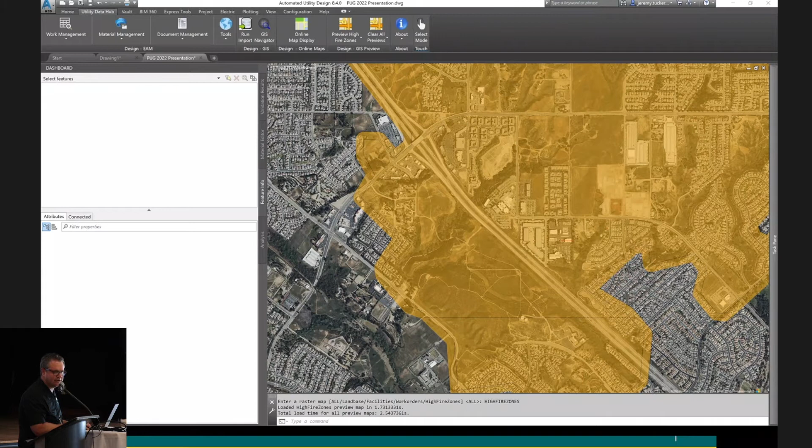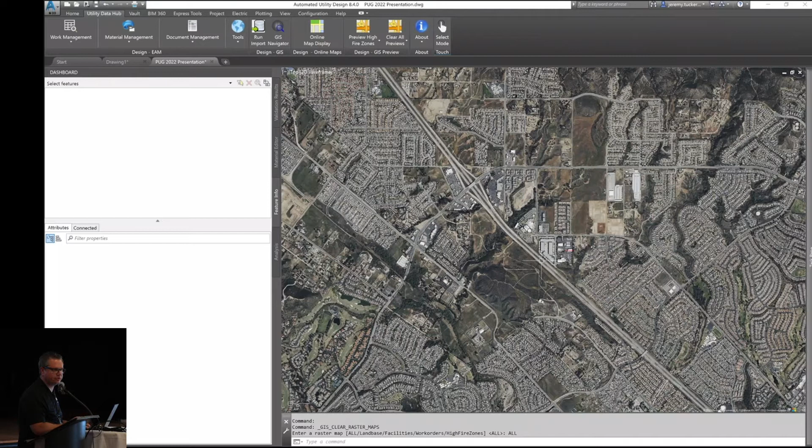When we're doing design, you need to know when bringing your stuff in, how do I design it? Do I need to use some of the materials designated for high fire use - some of our fusing and fault indicators and conductor and even poles. We're using composite poles in those areas now. So you want to know where you're at, what zone. We have different ratings, like elevated or extreme. Basically you can overlay where you're at and see if it falls within.

The enhancement we're actually working on will allow you to select your facilities or features in the design and run a service that'll go pull the GIS, and it'll pull the actual rating out of the GIS and set it in an attribute on the design or feature. And we'll push that data back through with the rest of the work order information through the work management system and back into SAP and all that good stuff. So that's our high fire.

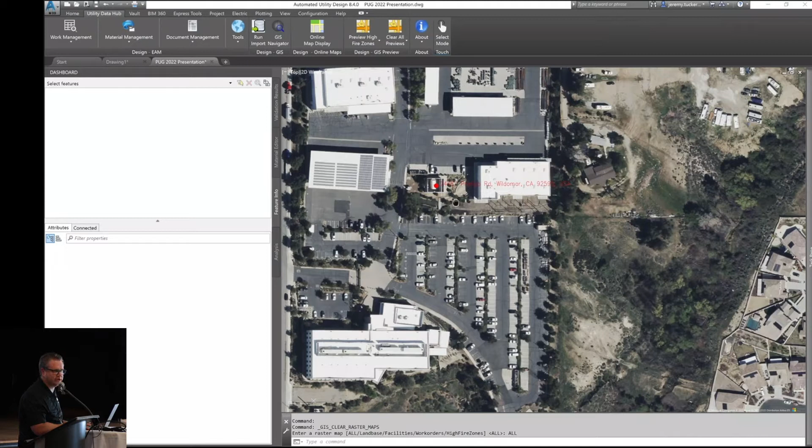Let me clear those and zoom back in so we don't typically zoom out that far. All these views are based on the extents of your model space that you're in right now, and also the zoom scale. So whatever zoom scale you're at, that's the zoom scale it's going to look at in the GIS when it pulls the capture out of the GIS.

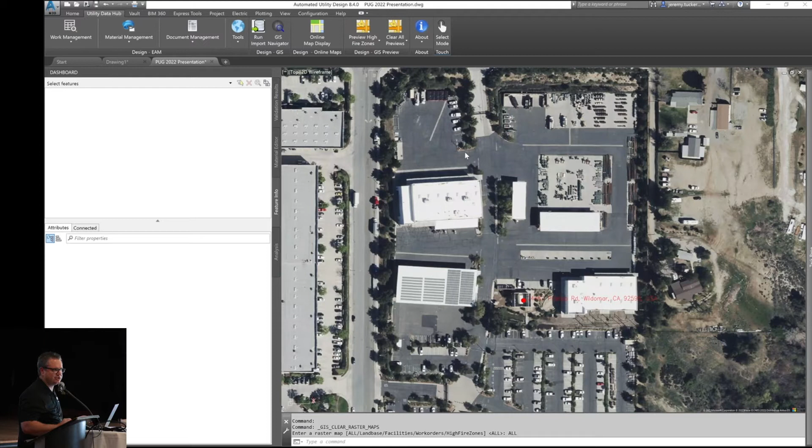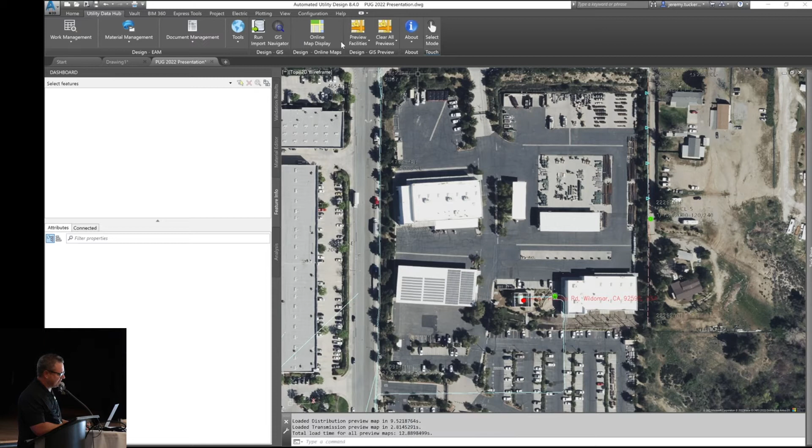So you got to know where stuff shows up - we get way more detail on our facilities the closer you zoom in. But this is really just to be used for reference. So when you're getting ready to import, you know where to make your boundaries for your import to bring the stuff in from GIS. You can see I brought in some facilities right there.

I can throw some land base in behind it from our GIS. And as you can see, my extents there is just a raster.

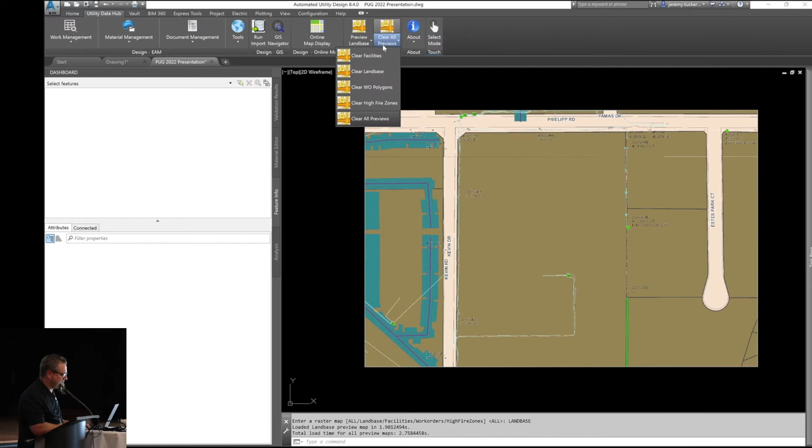Let me clear these again. There we go, turn this back on.

So this is our work order polygons. Obviously there's no information to it. It's just showing you, hey, there's work going on in this area, go check it out at this point right now. Go check it out in the GIS where you can get all that information. But it's a good, quick way without having to open everything else up to know while you're in AUD, hey, you got some other things to do here.

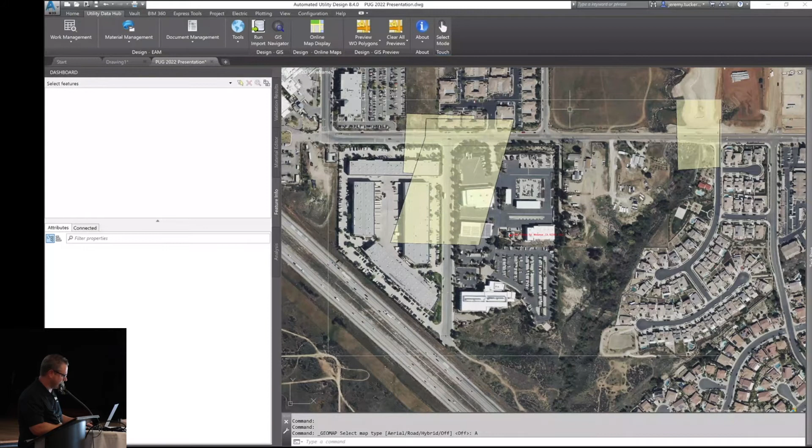So those are our previews. Let me jump back.

All right, SAP equipment details. So when we import from GIS, we are pulling in a bunch of attribute information data, but in some cases it's not all there.

So SAP is basically where all our assets are housed. So we created a service to be able to reach out to SAP and suck in equipment data, and populate it back.

Let me see what I said here. Yeah, so one of the nice things about this is you can just throw a feature in and type in the structure number and then make the call and pull that data in. You can be one to many, however many objects you want to select. You can run that all at the same time.

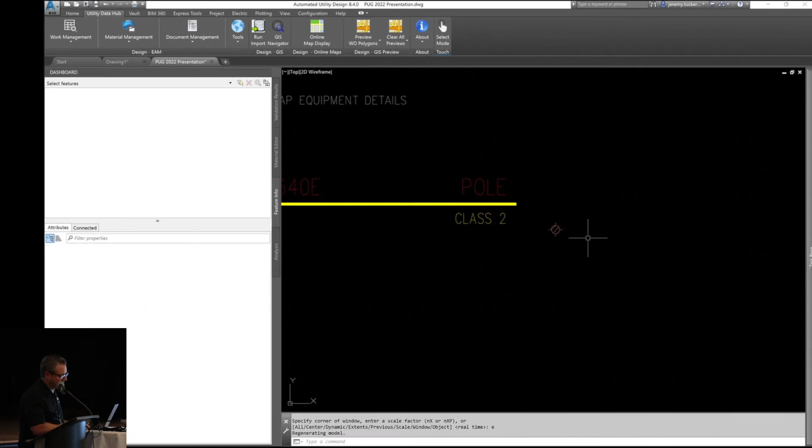Let me get to that here. I know it's not super exciting. It sounds neat, and then it's like, oh, all you did was push a button.

Basically right now, all I had to do on my pole was just provide the structure number. That's all that's required. And then I can come up and click SAP equipment details.

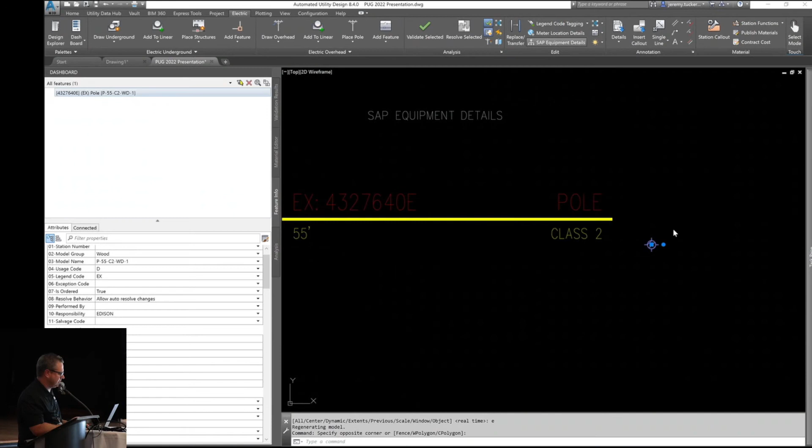And it's going to give me a message back saying that I did it successfully. There are a few error codes that come back from SAP if it couldn't retrieve the record for whatever reason, and it'll tell you what those reasons are.

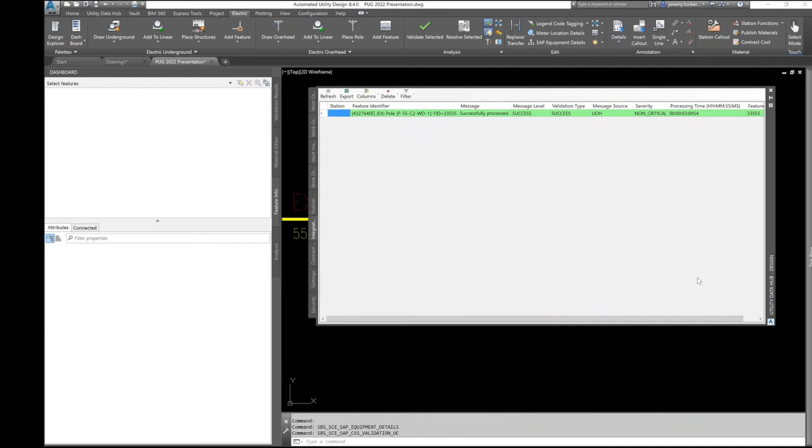But basically what we've done, if I go back and select this pole now, so I was able to bring in all this different information about this pole. I have anything that was inside of the SAP record basically associated here.

We're not really doing anything with that right now, but it is there for informational purposes. There's a few things like JPA numbers and that type of stuff that we plan on populating in the future and creating some reports and stuff like that.

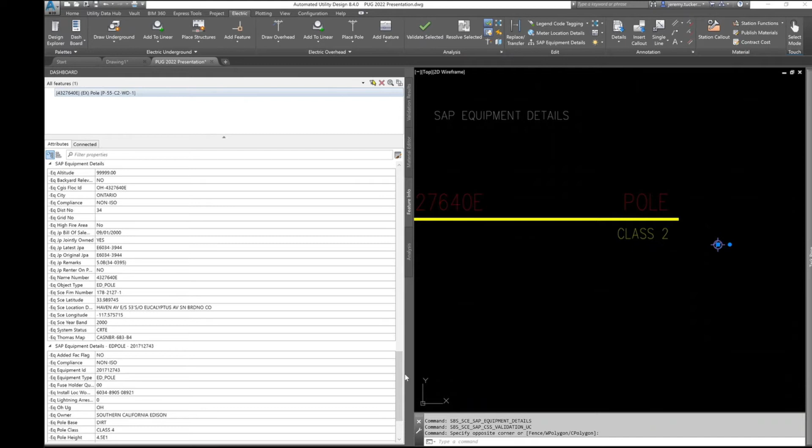So that's SAP equipment details. We have a similar thing for meters. So all of our customer information moved from a homegrown application into SAP ISU.

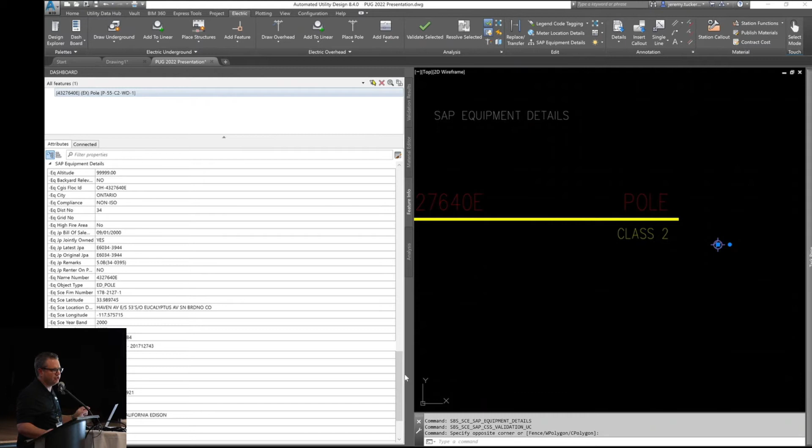And so we actually now have the ability to make a call and pull the device location and all the meter customer information. We're using very little of that in the AUD design because that was one of the things we were trying to get away from in our last system, was not doing much with meters. So we're just providing basic address information and stuff like that.

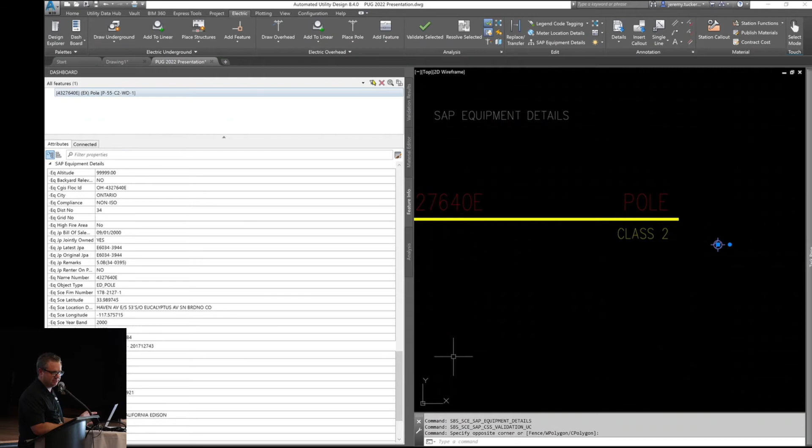But it makes it nice and easy for the designer, not having to go search somewhere else and then come back and type it. They can suck that data in. And I won't demo that because it basically looks the same as SAP equipment details, does the same kind of thing.

All right, annotations, everybody's favorite thing. When I was putting this together, I was kind of laughing because all I'm going to do is press a button and my annotation is going to show up, and you're going to be like, ooh, that's really neat. But what actually went into making it do that was a lot of work. So hopefully it gives you some ideas of what can be done.

The first one would be what we call the station call out. That's the work location, basically. In our old tool, in the old AUD, we actually had a custom user interface where we entered in material. And as part of that, we actually had the ability to edit the descriptions of the material, move the order of it, how it showed up in the call out when we placed the call out. And obviously AUD doesn't work like that now. All your annotations are rules driven.

I'll say out of all the things we delivered, this is the thing we got the most complaints about, because people wanted to be able to move everything around. But what really happened with it caused problems for us. You saw how many designers we have, how many different departments. Everybody was doing it differently - the descriptions were different, the order of the material was different. It was crazy.

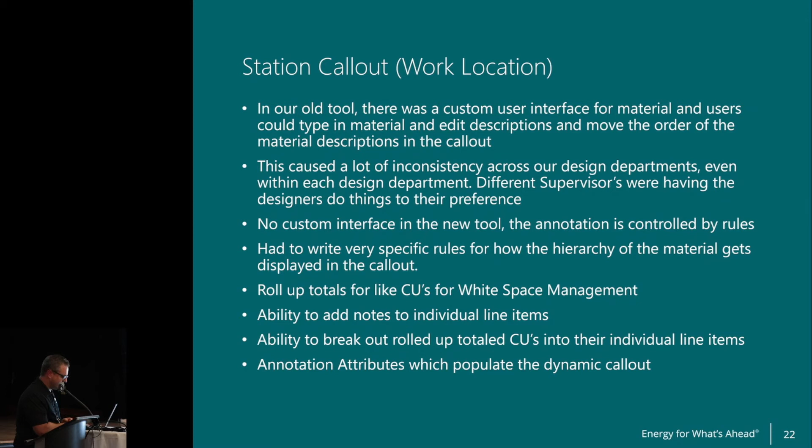I told Jim I hope I don't offend him with my high-level generalization of the rules that he wrote for this.

Basically what we're doing is starting out with the construction type - is it overhead or underground? Then the service type - is it primary, secondary, service, street light? And then it goes to the feature class, ordering it the way I showed you. So if it's primary, structure's always going to be at the top for us if you have a structure in the list, and everything else falls behind that - primary duct, primary pole head, primary equipment, primary conductors, and then secondary and so on. Then it breaks it down by status.

Status is very, very important to us - a lot of our pricing rules in our costing tool are driven by the status. So on the top half, we have like 4 or 5 different statuses for remove, and 3 or 4, maybe 5 different install type statuses. They all mean things, but they all should be shown in a very specific way in the callout. So as you can see, it's starting to get way more complex - it's not just put in first, it's more than that.

But at the end of the day, what we're really trying to do, what it all boils down to, is when you're on a pole, it builds the pole from the top down. And if it's an underground structure, it's from the structure out - that's basically what we're doing with it.

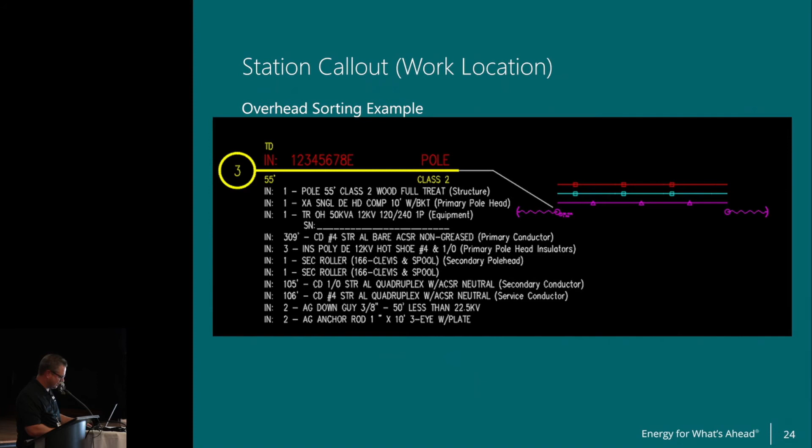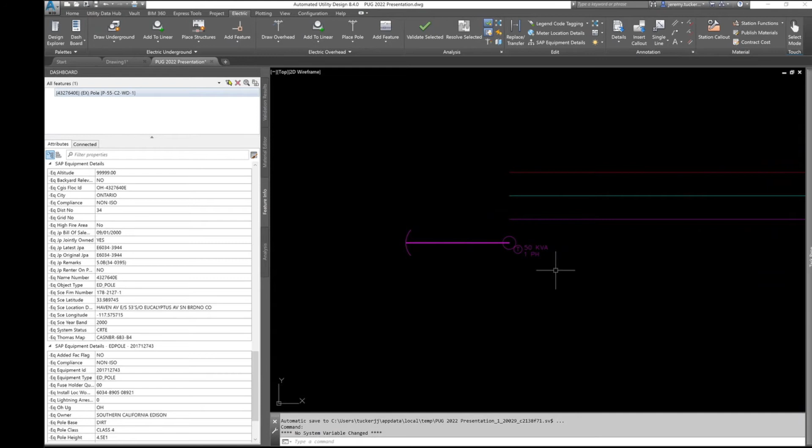All right. Oops, let's see. Let me move this guy back here. I'll kind of show you - I won't get too deep in this. I'm already over my time, I'm sure. I told you guys I could talk all day about this. What was that? I could. But then I won't know what to do because it's a different color. I'll be like, oh my goodness. That just blinds me. How's that for you guys? Does that help you guys? No? Yeah? Okay.

You're probably not going to be able to see my callout now because all our callouts are for black. But anyhow, let me just show you what we have here.

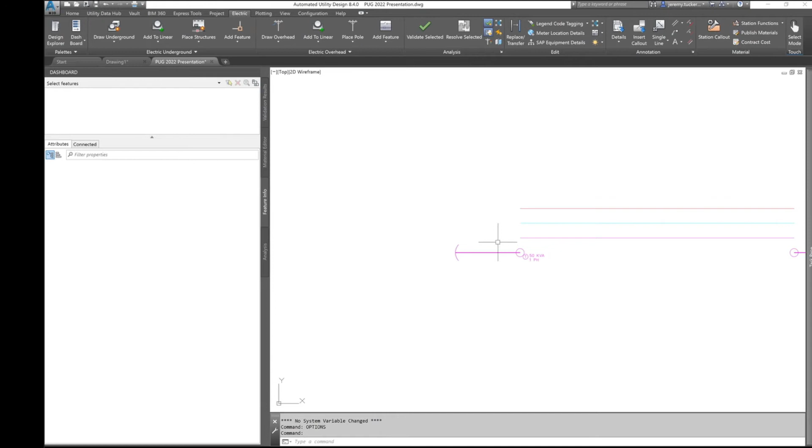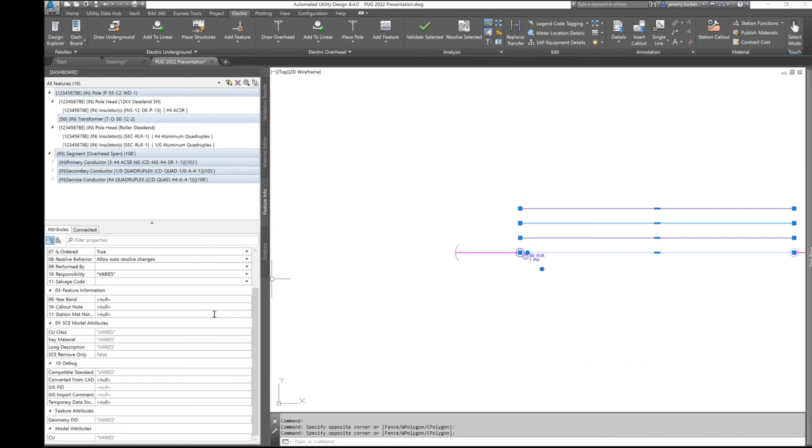I've got my pole - I'll run through these quick. Got my pole head, my insulators, my conductors. I put primary, secondary, service on there. And then basically all I had to do was put my pole number in, and now I'm going to come select my things that I want to put in my callout.

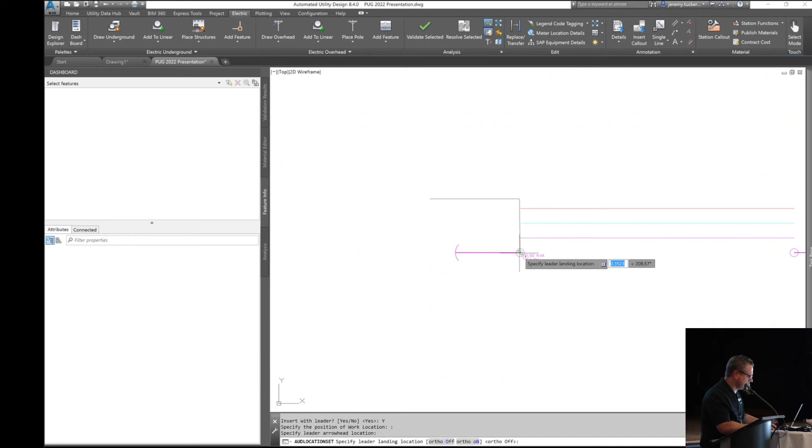So you can see at the top, you've got the pole, then the cross arm, then my equipment, and then my conductor, the insulators, and then it's moving down to secondary. There's my secondary conductor, my service conductor, and then my down guys and my anchors are always going to come last. So that's kind of how that works.

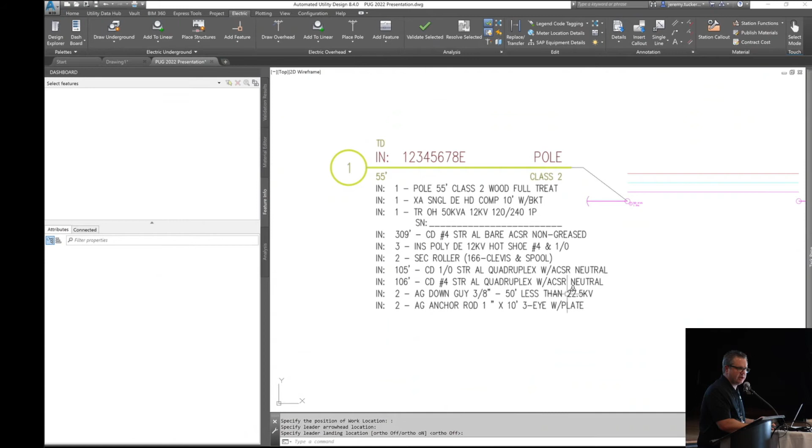While we're here, I'll show you some of the dynamic stuff that we have.

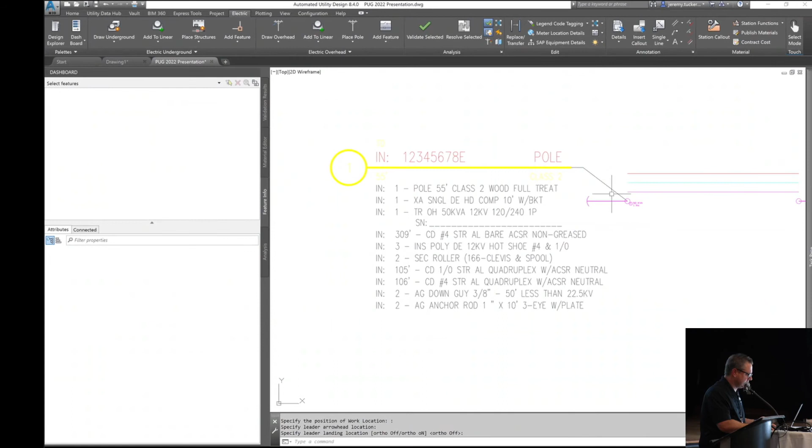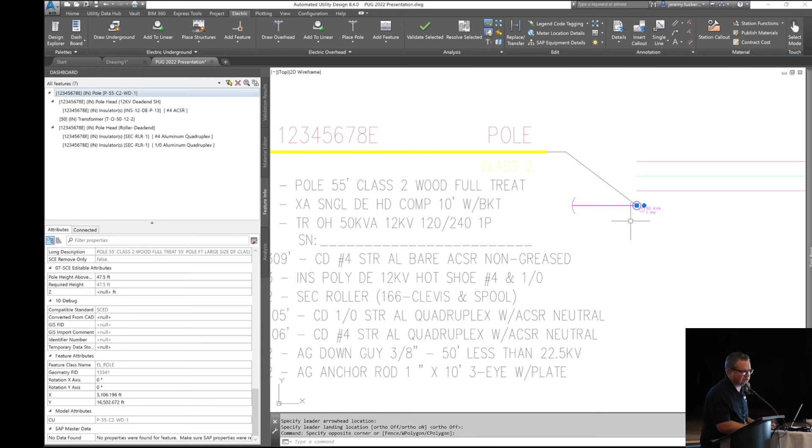These attributes are always going to be on the structures. Typically, 9 times out of 10, we're going to station the structure. We do have cases where we're stationing equipment using separate work order numbers because our costing tool can't accept multiple work order numbers on one station, so that was kind of a weird one. But anyhow, let me move this over so we can see. I'm on the pole.

So the first one I'll show is the high fire, and this is what we're talking about automating. Right now it's just an attribute that the user has to set.

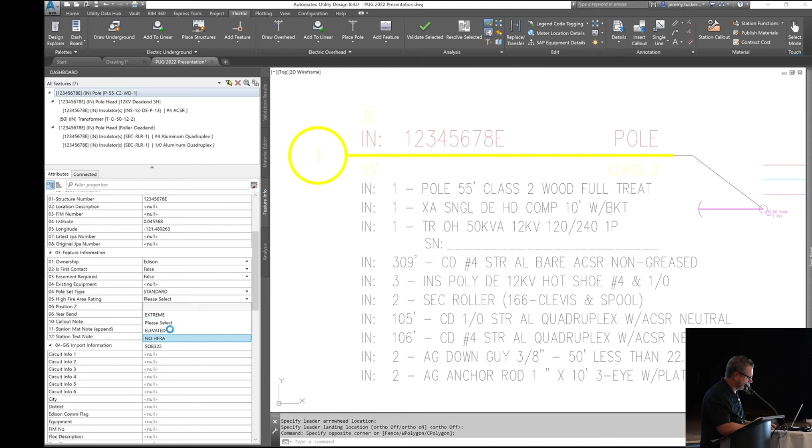Let me actually select something this time. So if you look on the call out, when this finishes right above where it says pole, it's actually in yellow, you can't see, there we go. So it populates extreme up there for you.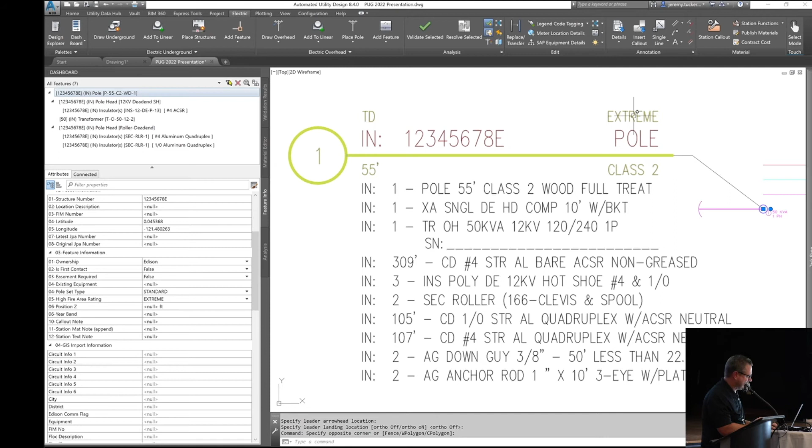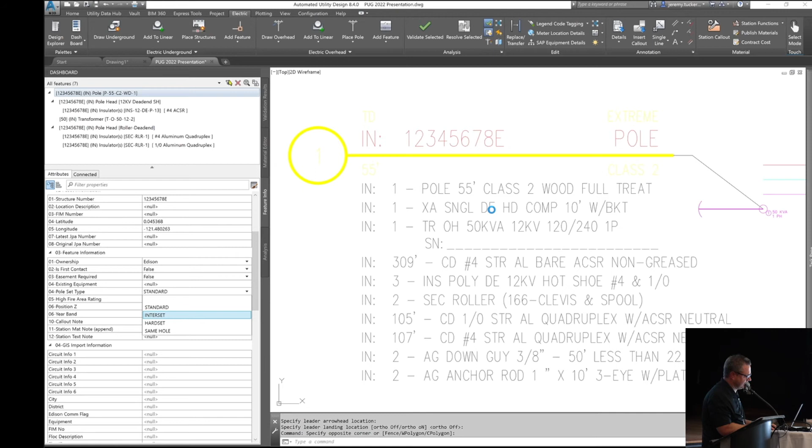Then we have the pole set type. So this would just be like a new pole going in, nothing in the way. We do have different things, so these are more like crew notes. So like if it's an interset pole, we're going to call it out interset, or hard set, or same hole. We kind of gave those things.

We did also add, if there's an easement required, it's going to populate automatically if you set that. I'm going to put it at the top. And then...

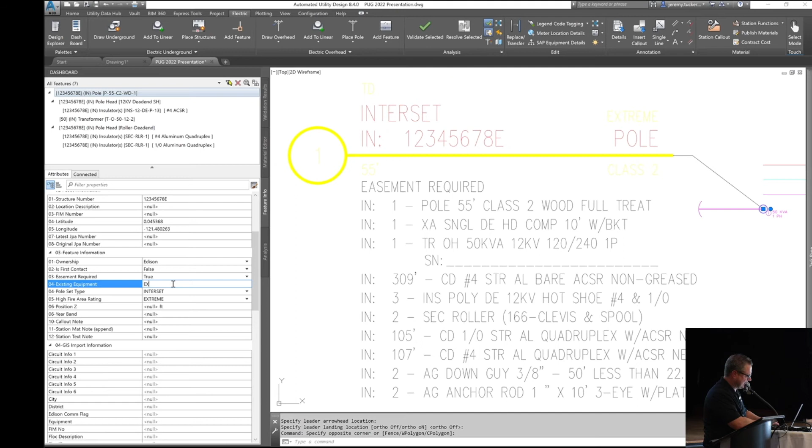We added a place where you can type in a note. This may be something that we automate more in the future, but right now it's just a type in. It allows you to put existing equipment on the pole. So part of our rules right now say, hey, if something's status is existing, obviously it doesn't go on the material list, so it doesn't show up in the work location. The reason we didn't really automate this yet was because what if you don't want something to show up? That's why we have it as a type in right now.

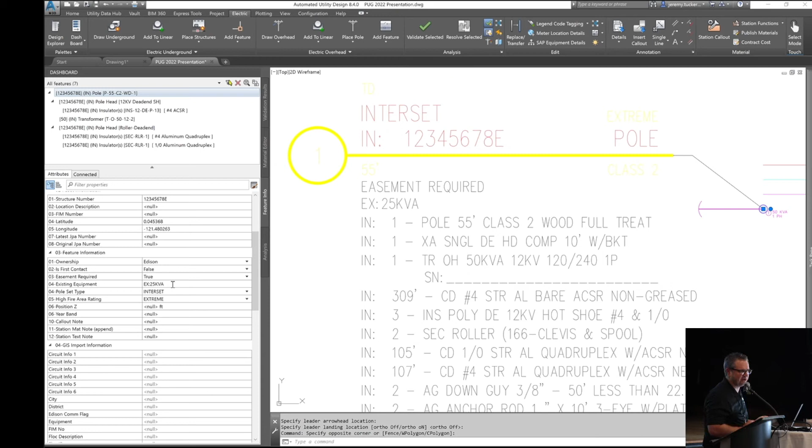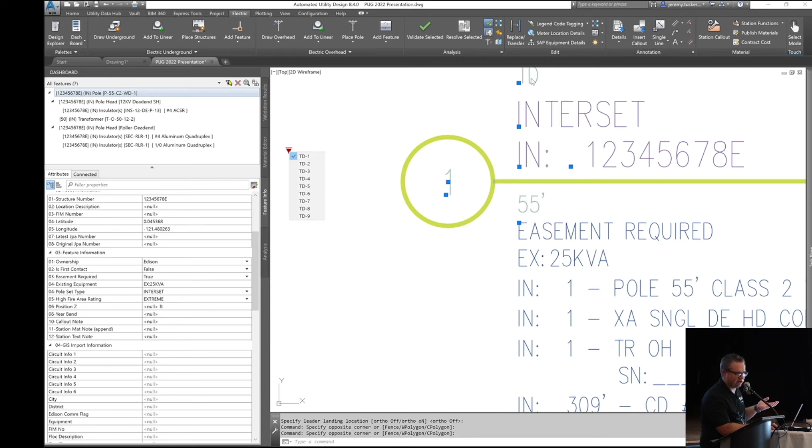So that's my overhead. Oh, we did do this - crazy request. So we do have, for when we have work orders or designs that have up to 10 different work order numbers on it, depending on what kind of work you're doing - some could be program work, some maintenance, some new, that kind of stuff. Some of these jobs are so big it's too hard to read through the map and say, hey, which work order number is it? And by the way, we are populating the work order number right here where it says TD above it. But what we're doing is we actually have a legend for this that gets placed as part of the final map, and it has the TD numbers that actually match the different shapes. That helps with the work order review and keeping things straight. We'll probably throw that into the attributes and relate it to the legend we created. We just haven't gotten that far yet on that kind of stuff.

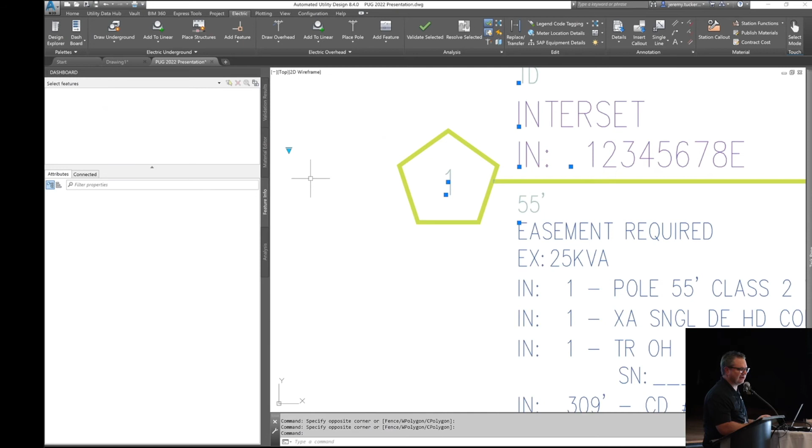All right, I'll just show a quick one on underground. I don't want to belabor this, I just want to show how we split out stuff. So I'll select these.

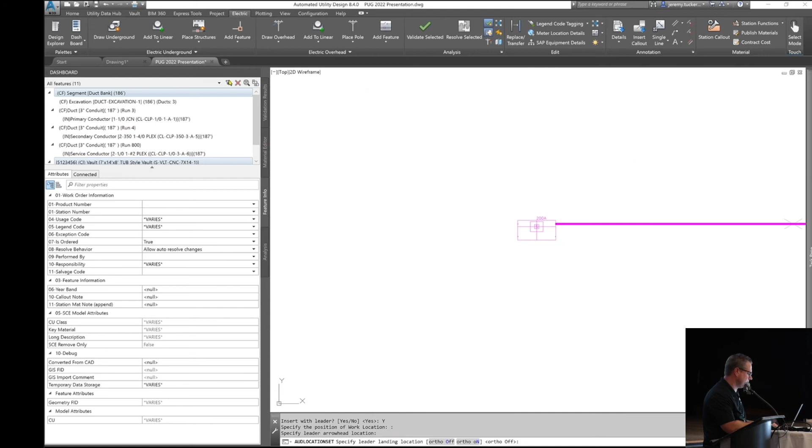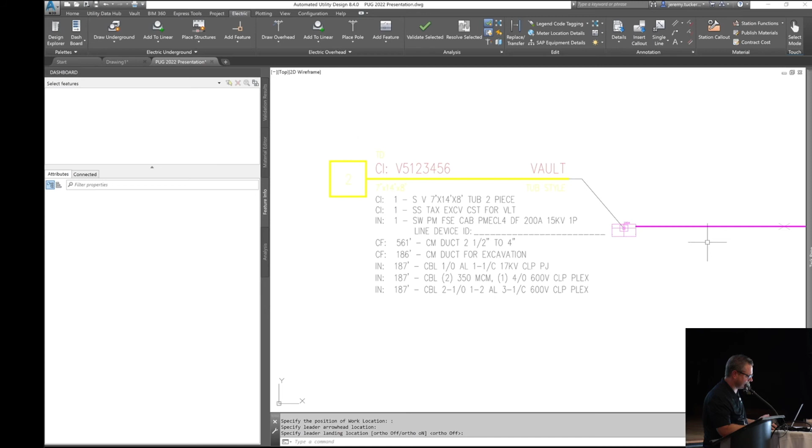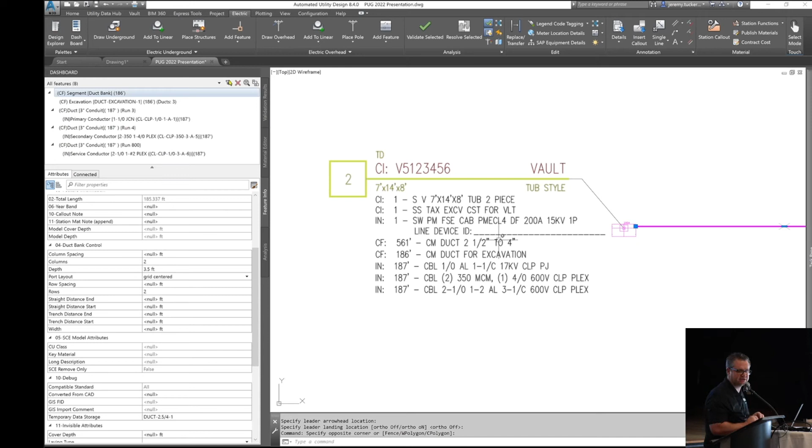So as you can see, it did the same type of thing. You've got the vault, and then it has the switch and the duct and the cable. But if you look here, I actually have a couple different runs - some primary and some secondary - but it rolled all the duct up into one total, so you can't tell how many feet is primary, how many secondary. This we've actually added on anything - any feature that does this, that rolls up, you can do this, but this was an easy example.

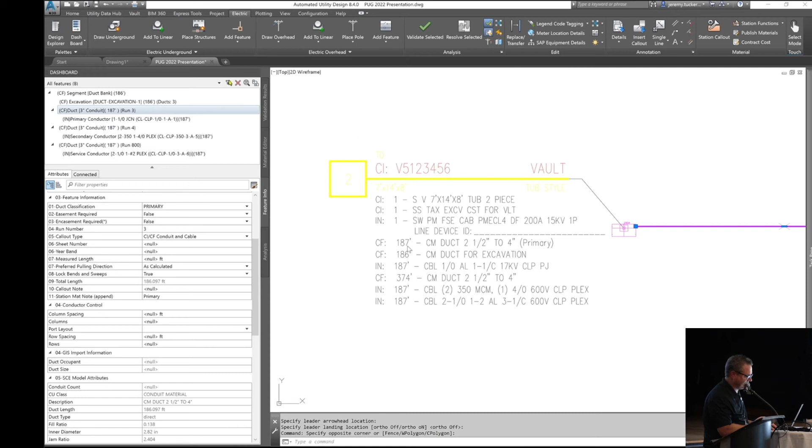So I can go to the duct, and this one's my primary one. I'm going to come down, and in my attribute here, typed in primary, and it breaks it out now, and you can see that where I typed in primary. So we're looking right here now. So now it went from like 500 to 187. So it broke out that individual run. And so I can do that on any of them.

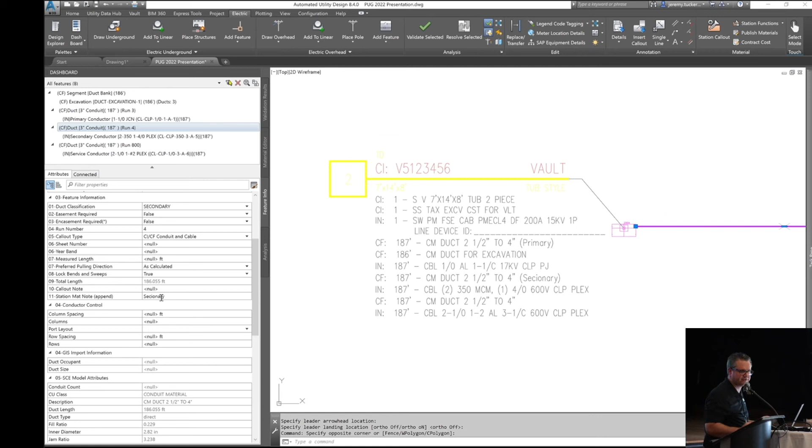So like if I will go to my secondary now, so now I broke out my secondary. So that's been very helpful, and that's kind of how we appeased the users. They're like, hey, we can't write notes, we're going to burst the call out. And we're like, no, don't burst the call out, please. So this has actually helped us out a lot by adding that. That was something we added after the fact, after rollout, just based on feedback and stuff. So that's been very helpful to us.

All right. This is our pride and joy right here, or it's our worst nightmare, the next one. So this is our underground duct and cable call out. We needed the ability to capture the number, the size, the length of the ducts.

That's pretty common. We needed the ability to capture the cables in the duct with the status and the phasing and the cable pulling results. So we show the cable pulling results on the map as part of our print. So that was one of the requirements.

We need the ability to control and track duct runs breaking off from the main trench line. So trench is very important to us. We actually tax customers on trench. It's a tax that gets collected by the state, and we get audited on that. So we have to be very careful in how we do our trenches. You got to make sure you're not doubling up segments, because every time you put a segment in, we're charging for more trench excavation and stuff like that. So that was one of the things.

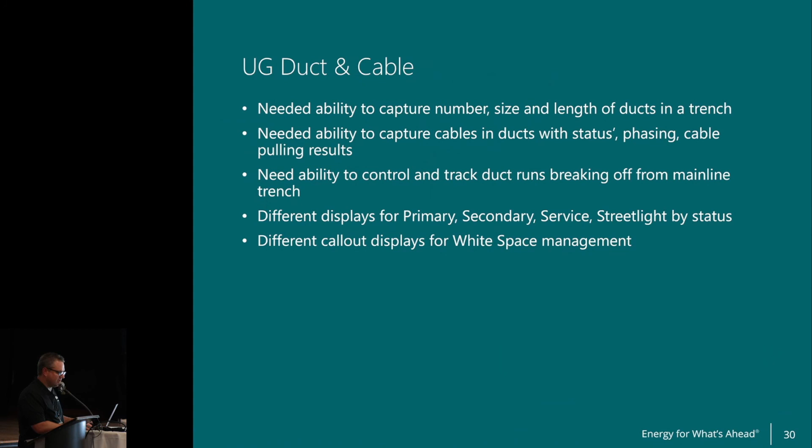And then we have different call out displays for white space management. Again, for some people, they may be like, ooh, big deal. We'll just use this same one here. So our call out is actually related to the duct.

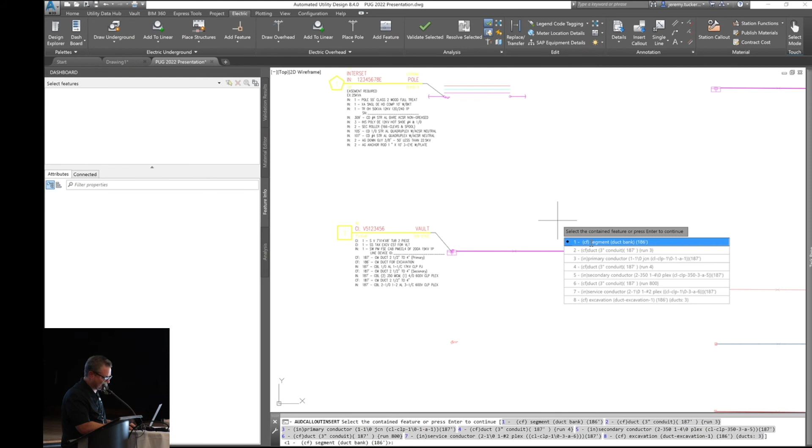So you can see the 3 in the circle, that's our run number. And then the box tells you how many ducts, what size, and how many feet. And then below, it has the from-to, so it's telling you what structure it's running from, where it's going to. And then it tells you the cable. This happens to be primary, so it tells you the voltage, and then the tension results at the end.

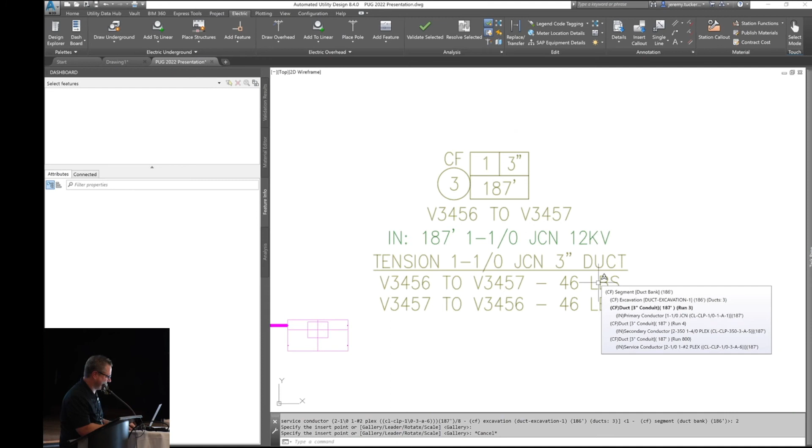Woohoo! So I'll just show you the couple different views, and then we'll go to the more complicated one. So on the duct itself, the attribute is there in our feature information.

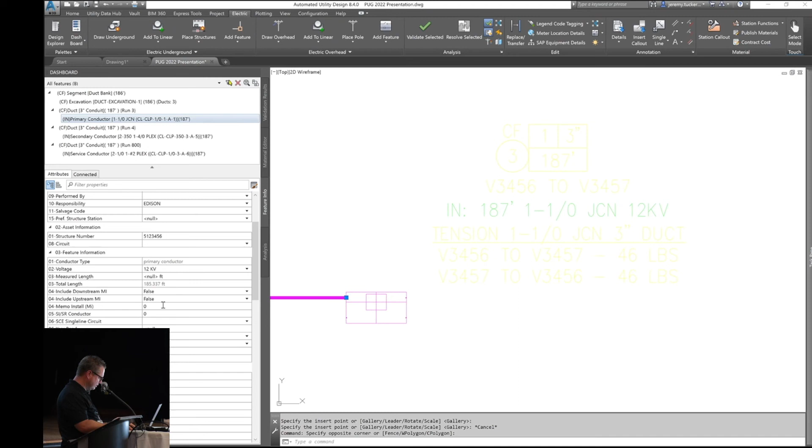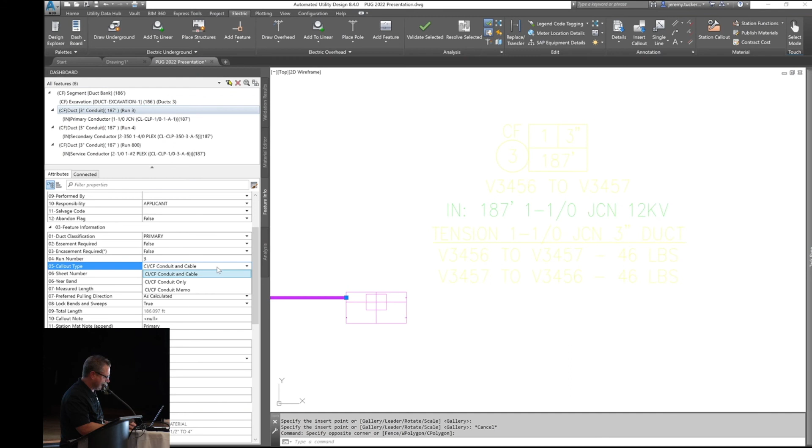Oh, I'm on the conductor. I'm like, where is it? There we go. So call out type - we have different uses for this, but we have the CI/CF conduit and cable, which is what I just showed you. Then we have conduit only, and we have memo when we're crossing prints, so we don't double call out the lengths and stuff on it. But it's all dynamic, so I just come here and change it.

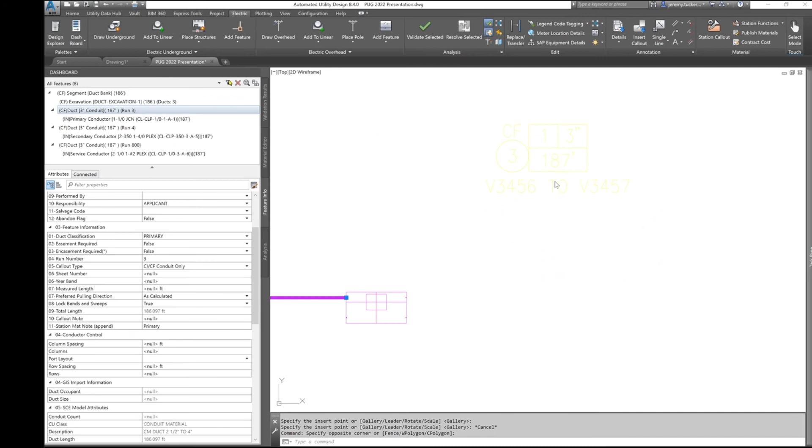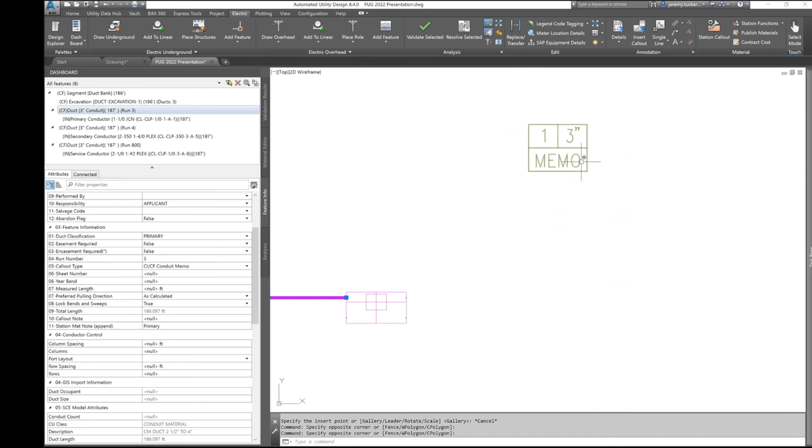There we go. So now you see the cable and the cable pulling results are no longer showing. It's just a duct-only call out. And then the memo. So we have this for basically all the statuses or all the types - for primary, secondary, service, street light, we have different variations of this, but it works the same way.

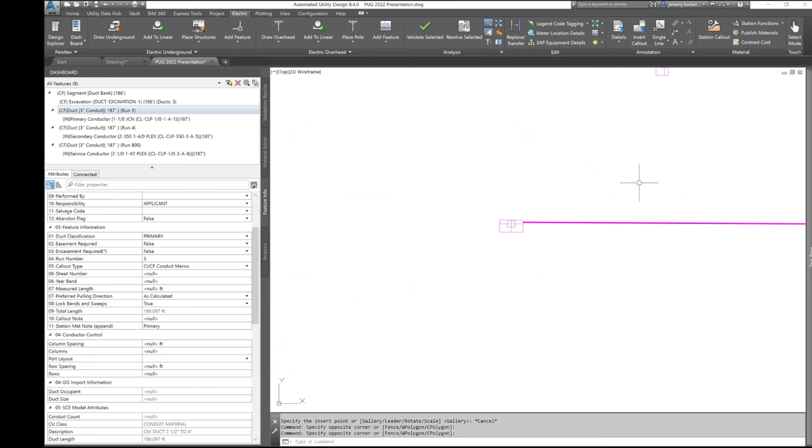So here's the fun one. So right now I think I have - okay, so I just have one duct, one cable right now. I'm going to add 5 more in there.

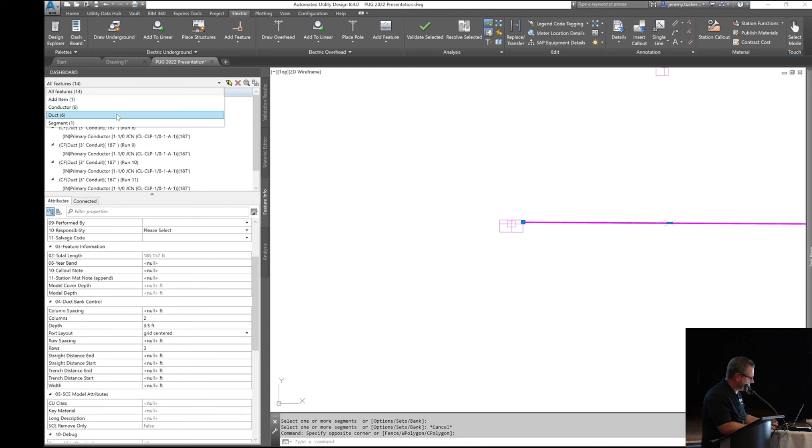Okay. So the first thing that we want to look at here is what it does by default - you can see it places them all in a different run number. And this was important to how I was speaking of how we need to break out our ducts and our trench and all that stuff. So this gives us total control of putting stuff where it belongs. We had some struggles with that until we kind of implemented the run number, and then that really smoothed it out.

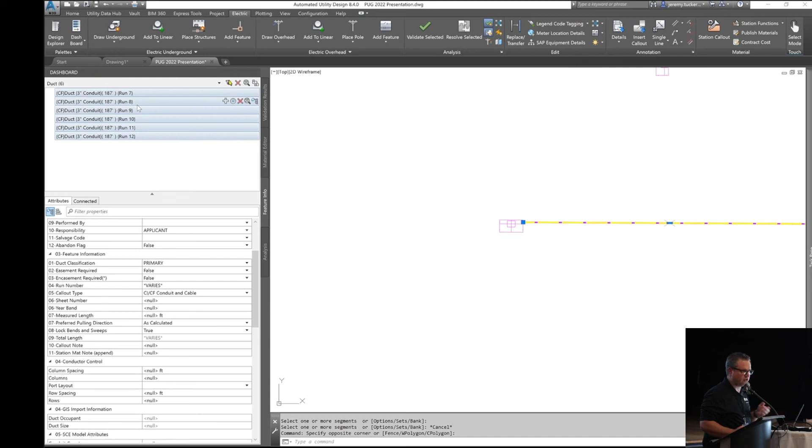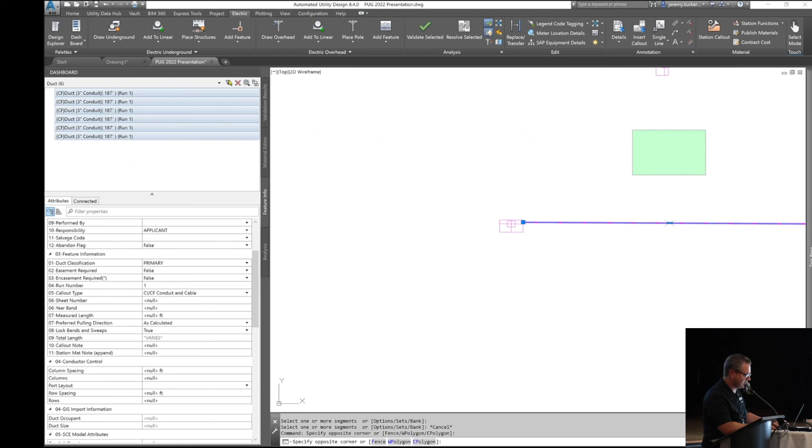So what I'm wanting to do, since these are all in the same trench, going from the same from-to, I'm going to put them all in the same run. That's my first step here. So I'm going to come down and we'll just put them in run 1. Okay. And then now I'm going to place the call out, and then I'll show you the fun stuff.

All right, so you can see in my callout now it says 6 3-inch, so it captured all of them. I put them all on the same one. We have all the conductor broken out still because those most likely can be separate circuits, so we want to make sure we're identifying the separate circuits. But if you look at the bottom, the tension results, there's just one result because we're using the same cable, so there was no reason to show it multiple times. So it knows if it's the same duct, same cable CU, just give us the one result. So that's fun, this is where it gets fun.

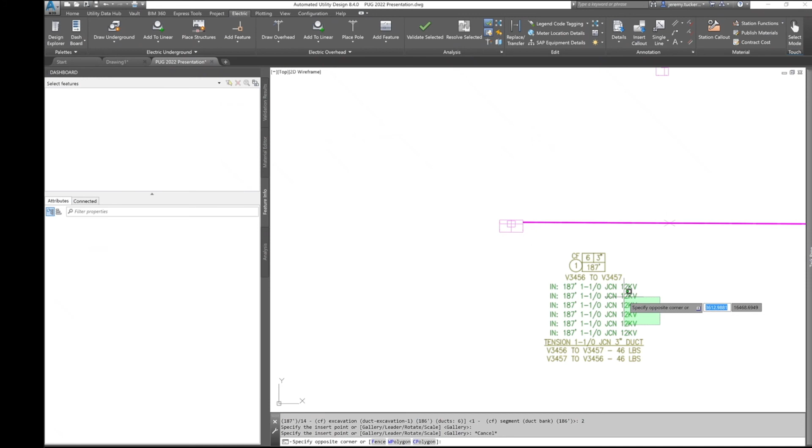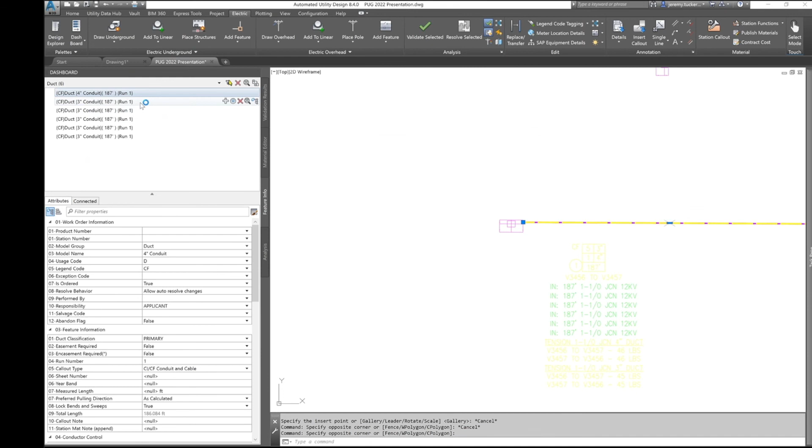So I'm going to select my ducts again. I'm going to start changing the sizes of the duct. I'll do one more and then that'll be enough, and then we'll wrap it up here. So I'll put you guys to sleep.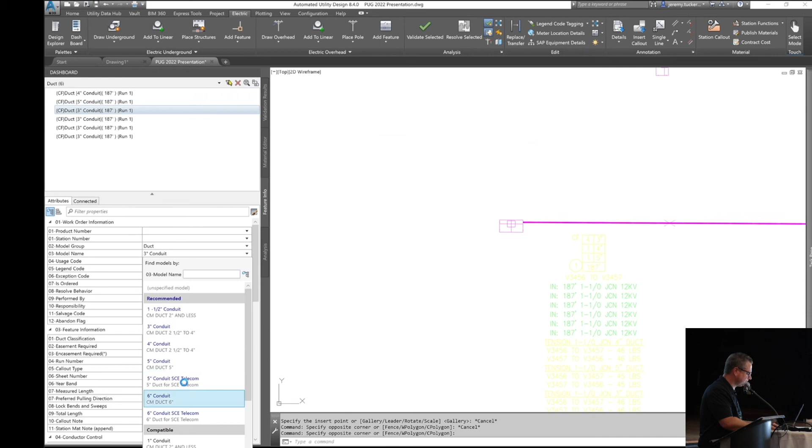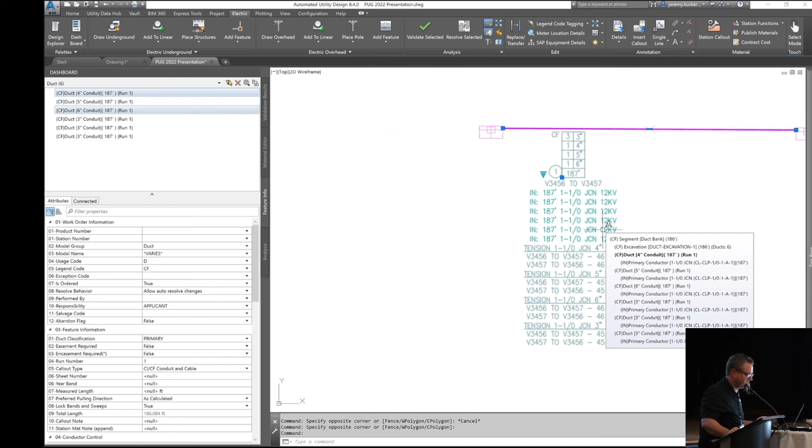So now when you look at my callout, it's dynamic, and now it's capturing all the different duct sizes. It's telling me, and it goes basically from the smallest size to the largest size from top to bottom. So if you look at the top, I still only had 3, I didn't change. So there's 3 3-inch now, 1 4-inch, 1 5-inch, 1 6-inch duct. So it's tracking the size and how many ducts I have. Also the cables you can see, but you can also notice at the bottom the pulling tension, because I changed the duct size, that it gave me the results for the ones where it's different.

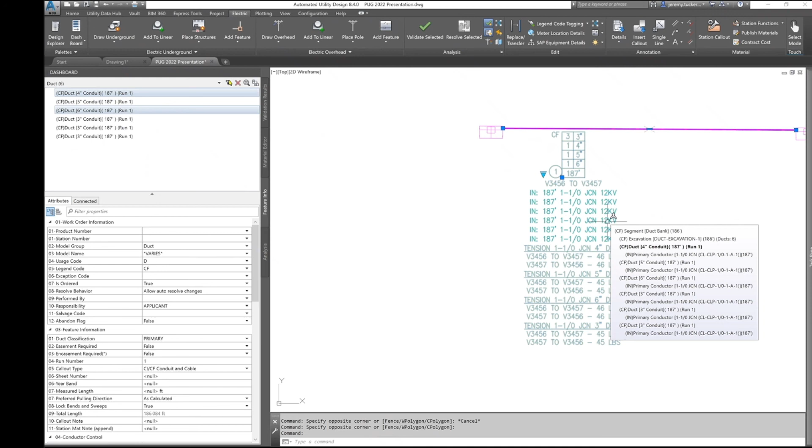This took us a long time to get right. The SME that we worked with, they were doing this with AutoLISP in the old program they were using, and they were using multiple callouts, and he had all kinds of crazy rules. But we're pretty proud of this one. It works pretty seamlessly now, and it's real nice.

I think that's it, I know it went way over time. Like I said, I could talk all day. We have more callouts, but these were probably the hardest. There are some other things, like I heard some folks talk about cable lengths. So we actually put in some attributes for wrapping of structures, so we put that power into the designer's hands. So like we have the AUD generated length, and then if you need wrapping, we have just a true/false field that says do you want it for the upstream structure and for the downstream structure, and you do those, and it'll automatically create a separate line item because we actually code that wrapping cable different, so it'll create separate line items and stuff like that.

So, all right. Well, that's it. Any last questions?

Hang on, let me pull up a design and I'll show you a print.

Yeah, I mean, it depends, most groups, so the local planning groups that are doing 1 or 2 work locations are printing on 11 by 17, and then our other big jobs are usually 24 by 36, that's typical. And we put a lot of construction notes, decals, and those are usually per our standard or on a separate page, and then you just have the design.

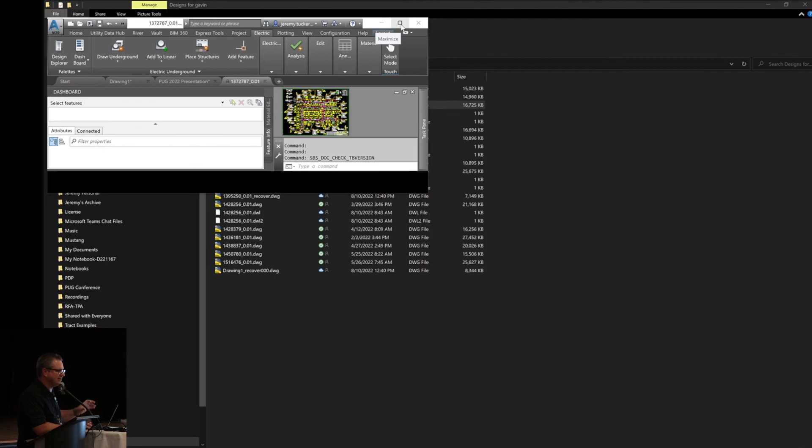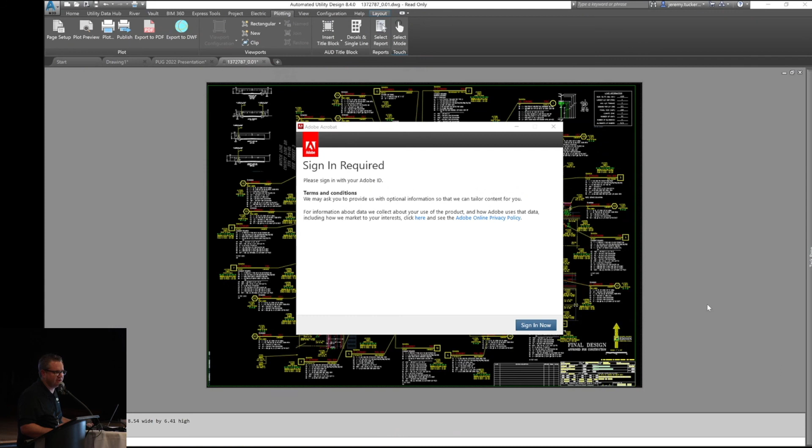So it depends on what system they were in. Like they were using mtext, or they were bursting callouts and adding text to them, or in the station callout, our old custom user interface actually had a notes field where you could edit the description. And one of the things I will say our designers don't like, and I'm not like a major AutoCAD person, but we got too far in and then we got this feedback, and it was like, oh well, so we decided to go with annotative scaling, and our station callouts are annotative, and when you put them in paper space, they don't work real good.

So I've read a little bit about that, but on these big jobs, they're doing viewports for some of those. They don't particularly like that, but that was kind of a trade-off that we had to do to go with that. So.